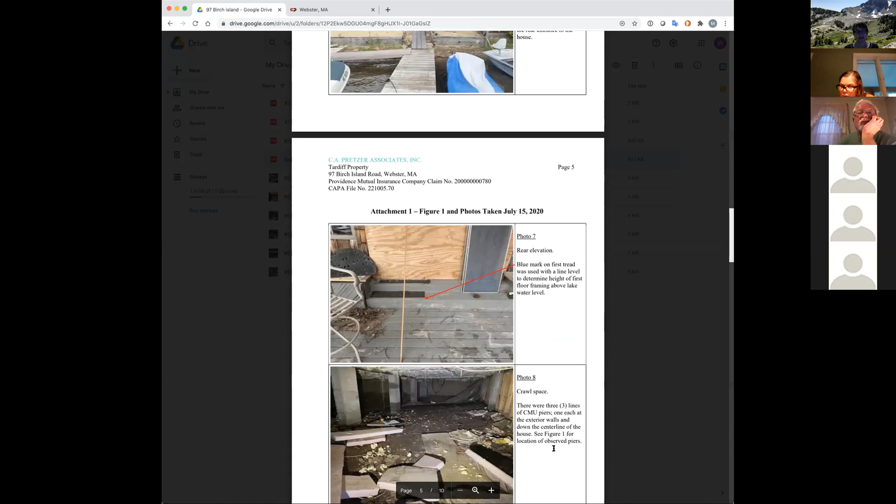Terrible. Yeah. And problems in the crawl space. Yeah, there's a lot of damage outside and inside also. Some of it just maybe junk, but yeah, a lot of damage.

Okay, so there will be a dumpster. I wasn't able to actually read that information that explained all the issues and the things they had to replace. But are they rebuilding in kind, or are they going to make improvements this time, or what's their plan? Oh, I think it's the same. They're not adding on or anything. They're just trying to fix it. Okay.

Yeah, I guess, Mary, you don't think they need any kind of protection in the back near where they walk down to the docks? It looks in the back like a patio area that's fairly flat, and then it slopes down toward the dock. Is that correct? Yeah, so yep.

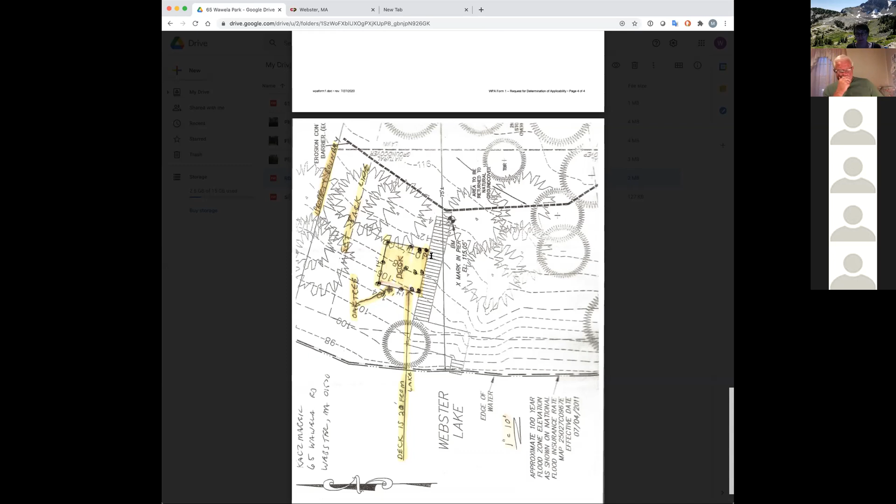Just so you know, Mr. Kaczmarek said that as far as when the work would actually be done, it really depended on when he could find a contractor to do it, and everybody's very busy. It could happen this fall, but it may not happen until next year. Oh, we have someone waiting.

Is there anything else on this one? I have nothing. I don't remember if I talked about the materials for the deck, but the cutting should take place on pressure treated - did he say pressure treated? Yes.

So do you guys still want the cutting to take place in the driveway? Yes, it's good practice. Yep. Okay.

All right, so I guess I will entertain a motion for this one, 65 Wawela. I will make a motion for a negative determination for 65 Wawela. Thanks, Hayden, I need a second. Second. Okay, Hayden, yes. Dan, yes. Robin, yes. Michelle, yes.

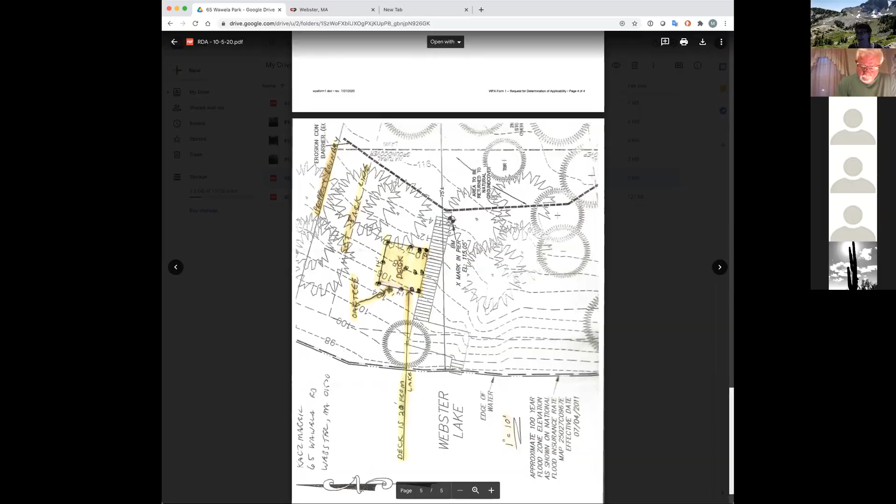So we haven't gotten Steve for 46 Bates Point, correct? Is anyone here for 46 Bates Point Road? We probably better - well, we can wait and see if he shows up, but maybe he's on Montana time. We could be done before he wakes up then.

Do we have to vote for a continuation on Hudworth? Yes, New England Auto Auction. Could I have a motion to continue New England Auto Auction to November 9th? I'll make the motion to continue New England Auto Auction till November 9th. I second. All right, Hayden, yes. Dan, yes. Robin, yes. Michelle, yes.

So Mary, I'm going to go a little out of order and do the other continuation so we can clean it up. I'd like to move for 23 Claybart Ave to continue to November 9th. Will someone make that motion? I'll make the motion to continue 23 Claybert Ave until the November 9th meeting. I'll second that motion. All right, Hayden, yes. Dan, yes. Robin, yes. Michelle, yes.

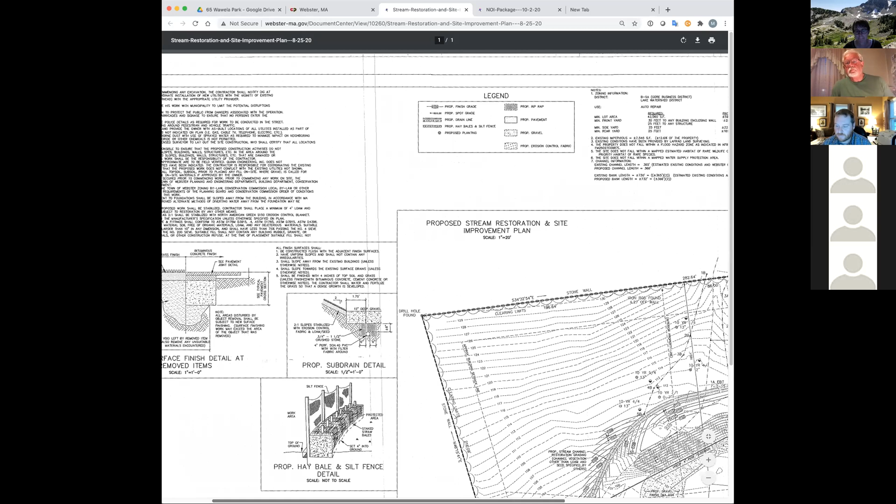So there was some unpermitted work that took place at 137 Gore Road. Behind the building of the business, there was a stream that was rerouted, some slope work done. That was noticed and reported, and notice of violations was sent out. It took a little time, but we got there in the end, and we have submitted an as-built notice of intent. Yeah, there's the plan, thank you. So, as it says, pretty much site stabilization, stream restoration, restore the stream to channel - that's really the lion's share of what took place.

So is there any particular detail anybody would like me to address? I think one of the things we talked about on site Saturday was that the grade on the plan and the grade in reality are different. Is that still true? I assume this is the same plan?

Yes, that is the date on that, revision 1. And there was only one revision on that plan, correct? Yeah, that is the correct plan.

Okay, looking at the site, you can see the plan there now. On the right-hand side of the slope where that letter H is, and from there to a little to the left, the slope is steeper than it is shown on that plan.

But a lot of time has passed. The slope has re-vegetated pretty well. It's a very bony soil, there's a lot of stone in that slope. Over the time this issue has been going on, even though the slope is steeper than shown on the plan, there doesn't seem to be any erosion down into the parking area. So it seems to be stabilized at this point, even though it is not as shown on the plan.

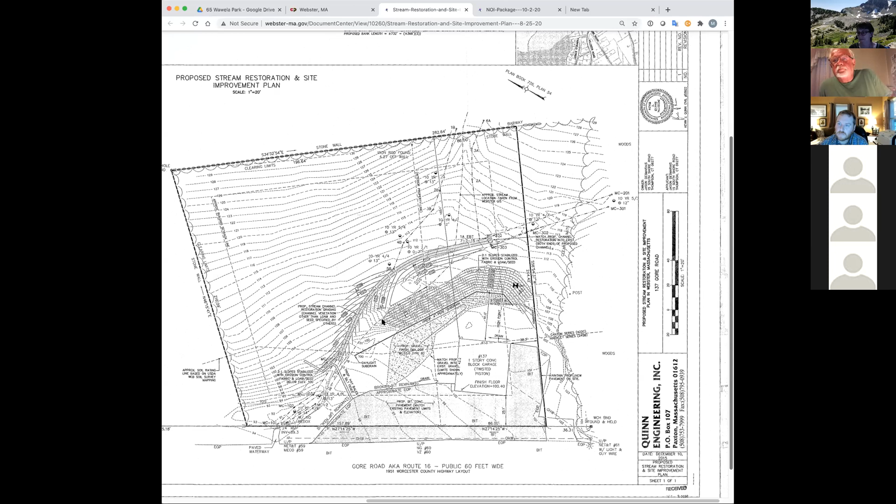We were also told on Saturday that 15 feet of pipe were removed from the end. I think back one of the times we looked at it, there was actually pipe catching some water and moving it along, and now it's more of a natural stream. Some of that pipe was taken out. Correct, yeah, there was a perforated pipe that had been in place and that was removed, and it's now just stone.

One thing that was a little unclear on Saturday, and I didn't think of it at the time, is there still a plan to put the line of boulders in the back of the shop? I know when you look at it, there's some stone at the very bottom of the hill, and there was going to be some boulder movement back there, and I'm unclear whether that's still going to happen.

So with your approval, he would like to place boulders at the bottom of the slope, taken from the top, move to the bottom. That would be in front, closer to the street than the current stone path. Plans to put them right at the base of the hill, right at the base of the slope, the stabilized slope.

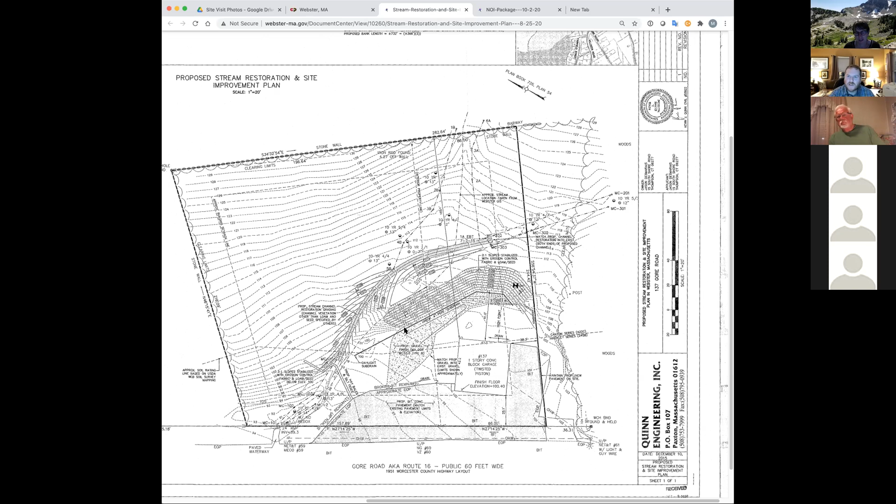It has that natural look. The coverage in those most recent photos looked pretty solid. Let's see, there they are. Yeah, there's a lot of stones and stuff, but yeah.

Yeah, I get the vegetation is reasonable. As we observed on Saturday, it's not pretty, but it seems to be functioning pretty well.

And I know in one of our previous visits there, Fred was concerned about the walls of the bank of the stream up gradient, he felt like it was caving in, and I asked Brandon if he had looked at it and had any concerns, and he did not.

Well, this one does not have a DEP number yet, Michelle, so we can discuss it more, but probably should hold off on closing the public hearing. Especially since, well, anyway, DEP may want to, because they were involved in asking him to do this notice of intent. We'll see what kind of input they have.

Are there any other questions or comments from the commission? Do we have anybody from the public that has a question or comment on this one? So quiet tonight.

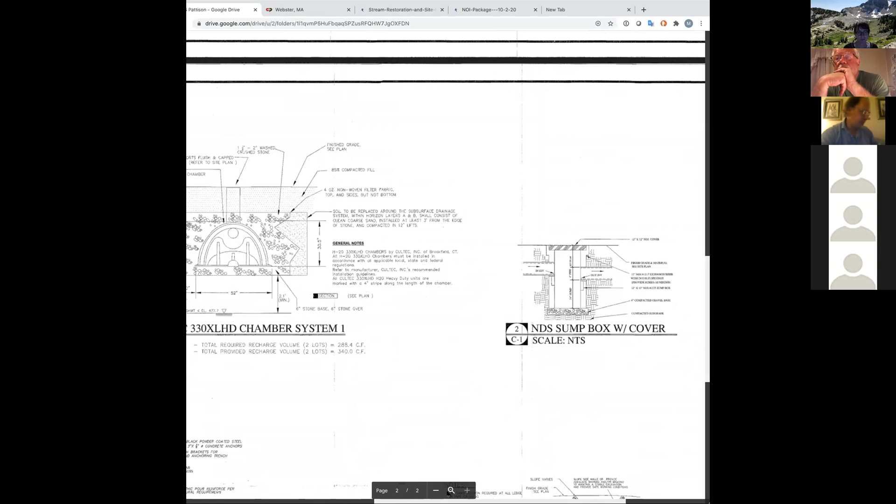So that's the basic design. We have also details on sheet number 2 of these systems. There's also a detail of the trench of the sump box. The Cultec chambers, there are 2 models, one is deeper than the other, as the land grades off, so we use the shallower ones. And there's also a detail for a roof overflow, roof leader with downspout overflow.

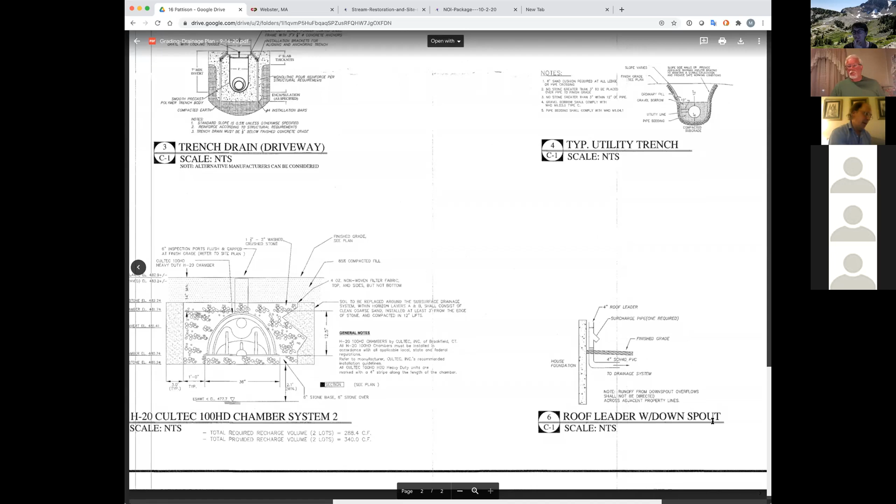So that's that. I'm available to answer any questions the commission might have on the design.

I have a question. Do the downspouts in the rear of the houses on the lakeside connect with these Cultec systems or not? They do not connect to it. There's only a partial roof of each dwelling connected to the Cultec systems. The rear downspouts go on splash pads. And then this was really the only change to the plan, using the Cultec systems instead of what he had proposed.

And it sounds like you brought the elevation of the houses up a little bit from what they were. Yes, I believe the original plan from Wetlands Identification was based on a GIS, not an actual survey. Right, this is the actual survey, and I noticed that it kind of correlates the same way. There's a difference of 2 feet there between the two plans, but it's basically the same thing. Where they have 484 between the buildings, we have about 486. It's basically the same thing.

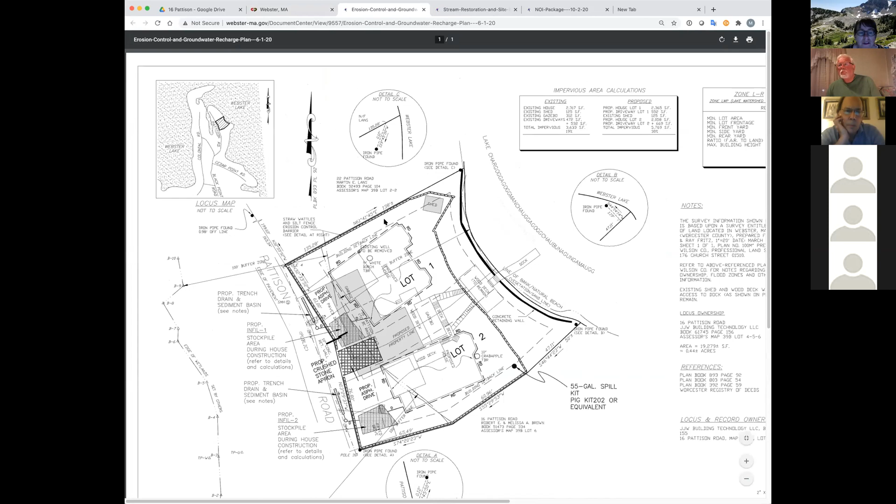Okay, so your question about the downspouts, that's from the original plan? Yeah, the original plan, this is the new plan. I can pull up the original, probably. Take me a minute here to find it. So we can see what looks different. So that was that. I mean, we approved what I guess the original plan did not mention the downspouts. It looks like it had everything going into this kind of crushed stone. I believe it's a crushed stone bed. There's really no actual detail of those. Right, yeah.

So once those downspouts hit a splash pad, they're going to hit cement and then go into the grass, or into the lake. They could also go into a crushed stone apron to dissipate some of the energy. We try to keep the slopes as shallow as possible. In the back of number 16, we have a somewhat large swale to convey the water also. So that's what we're working with, trying to flatten out the site. And yes, crushed stone apron or concrete pad will work also for the downspouts.

But then I guess I'm looking at 20 where it says downspout splash pads. What is that? A splash pad is basically a small concrete pad, it can be plastic also. Yeah, that's not what I meant. So once off the splash pad, is it going into grass? It goes onto the grass, yes.

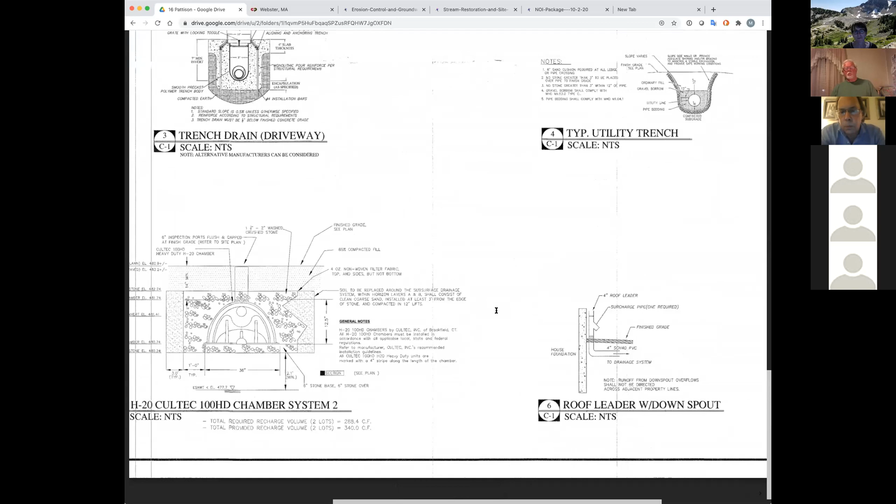I'm trying to figure out how far away from the lake it is. I guess there's a wall. Those rear downspouts, how much of the roof is serviced by those downspouts? I would say about 30% of the roof, each roof it goes into the infiltration system. 60% does not. So 60% is going to end up in the grass? Yes, and the grass and also on the roadway, on Pattison Road. And the driveways, though, they also go into the Cultec, right? So the Cultec is handling the driveways and then 30% of the roof. Approximately, yes.

The Cultecs seem like they're pretty large. Is it possible to route some of the roof drainage into them or not? Well, we take a conservative approach on the design of these systems. Some engineers use percolation tests, we use the Rawls method, which is very conservative, so we are assured that this will work. I would not want to overload the system by connecting more downspouts than what our numbers say they can handle. Of course, if you would want us to connect those downspouts to the system, we can certainly do that with the understanding that they will be overflowing on a more frequent basis.

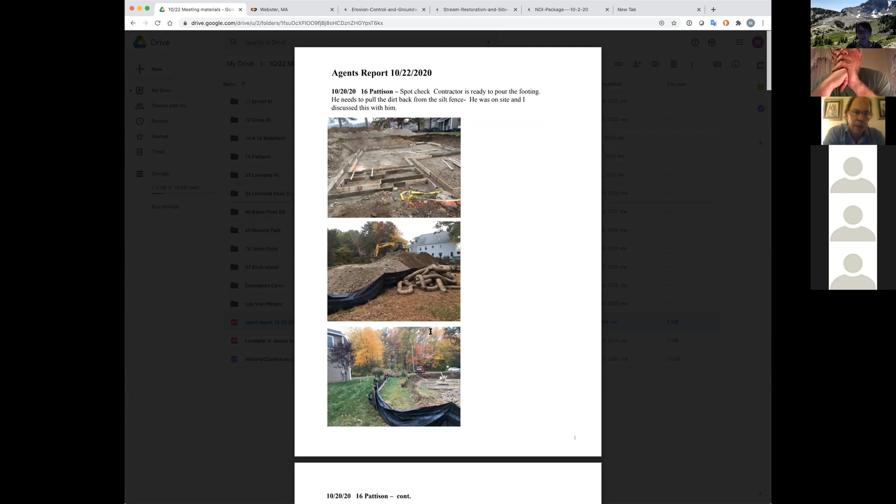Let's see if I have other pictures. On this side, it wasn't quite as sandy. This is the back, which he needs to fix.

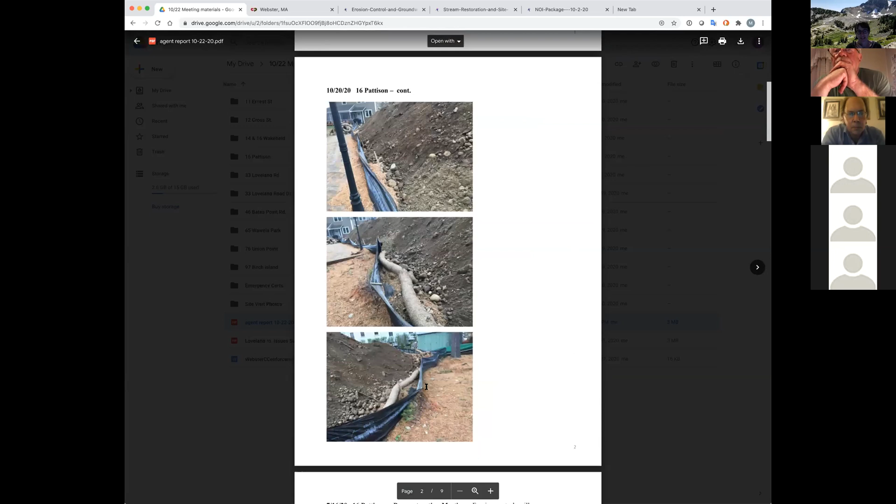I don't recall any new construction where 60% of the roof just drains onto the lawn. I feel like we tie in downspouts and do all kinds of other things to prevent that.

Well, and like I said, we can revise the plan and connect the downspouts to the infiltration systems. I think the elevation will allow that. If that's the only concern of the commission, we can certainly do that.

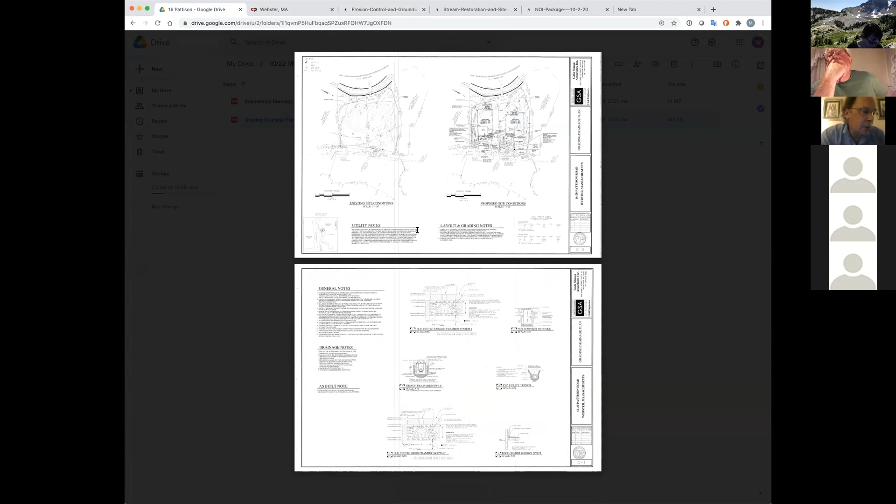Are your Cultec sized to handle the 60%? They're not, not as they are right now. They're not sized for that, according to our numbers. But there will be an overflow on the downspout in the front, preferably.

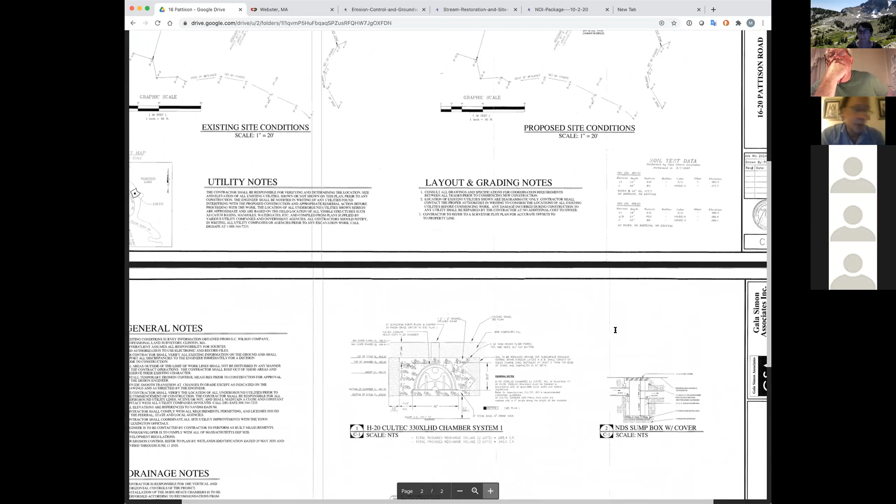So if it does get overloaded, it will just go up to the street, not going to the lake.

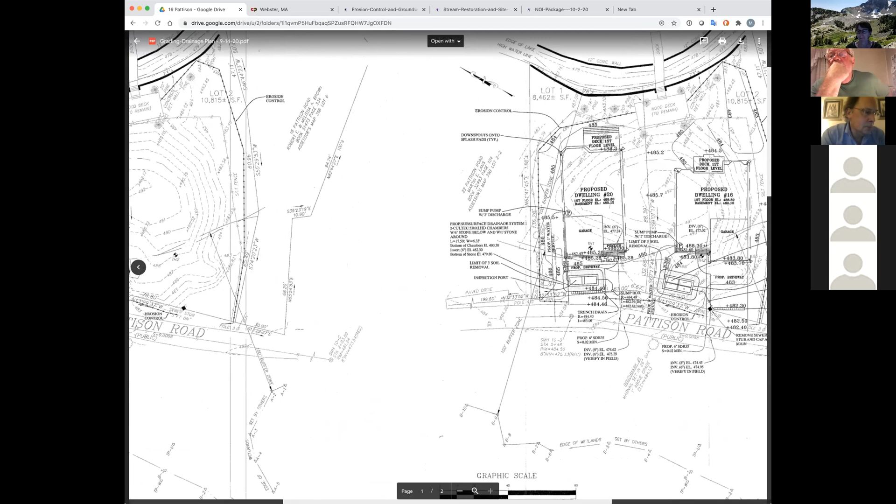Personally, looking at this, it would seem preferable to me that those Cultec have the capacity to handle at least part of the water runoff from the roof. If there's going to be Cultec there in the first place, might as well make use of them.

And but as you're saying, that would probably require slightly bigger Cultec. Well, it certainly depends. If we're designing it for the 10-year storm, we'll require probably doubling up on the size of the Cultec to handle that amount of impervious area.

Other than the cost of the additional size, would that cause any other issues that you're aware of? Well, we have water lines and sewer lines coming in the front of the building, so we have to work around those. That's the only issue I can see, other utilities, interference with other utilities. Yeah, it looks like there would be room to get around that.

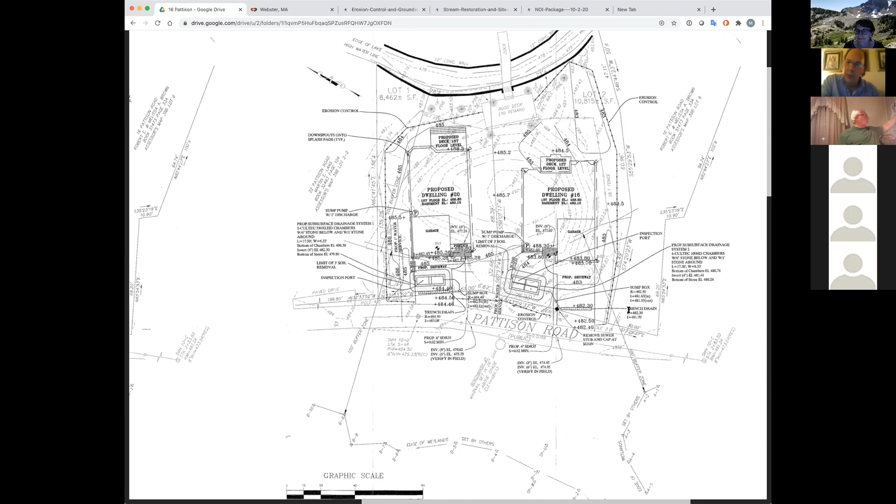Okay. I think we're on 76 Union Point.

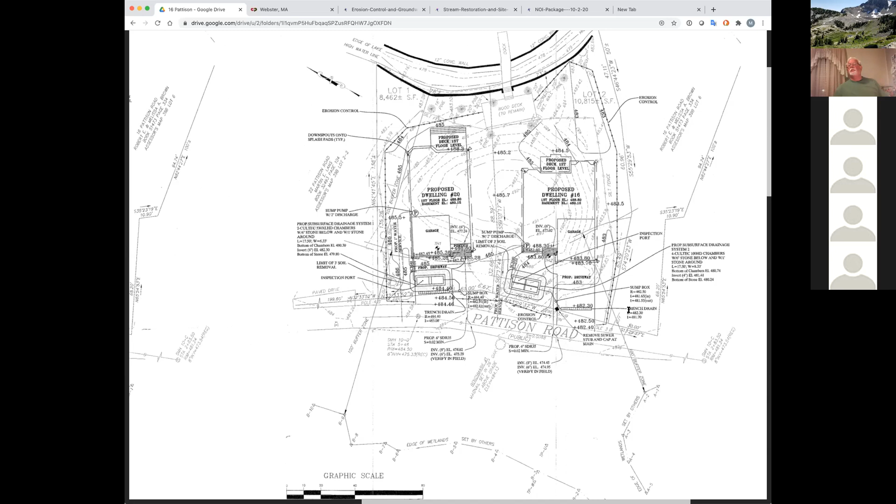Yes, and I believe I saw that Linda was on. And I'll try to pull up the pictures for her. Hello, Mary, I am here. I'm having a little trouble with my microphone on my computer, so I'm using my phone. But can you hear me okay? Yes, hey, you okay? Okay.

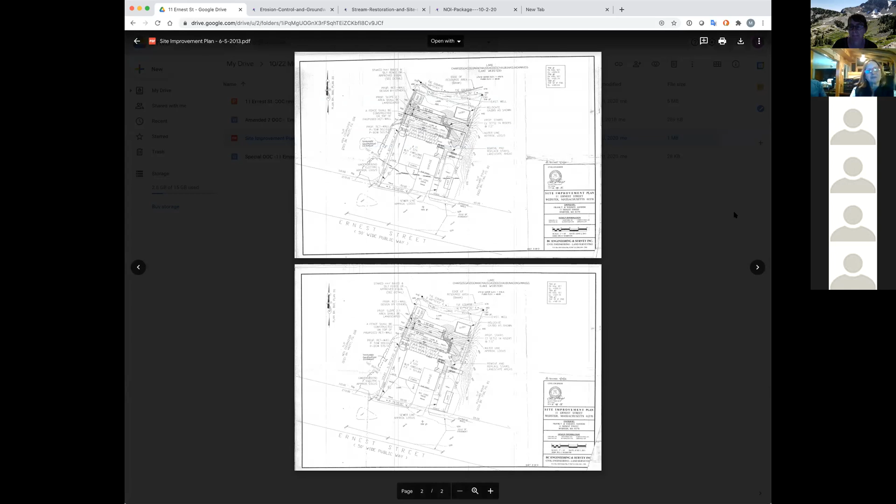We didn't think we needed to finish that before asking for approval, since it's outside the 100 feet. The part along the side of the house is finished. Right, that it is outside the 100 feet. I just did want the commission to know. So I have a lovely new fence here. They got the fence in, but they're still working on putting dirt in the holes, right? Right, and then right in here.

They had put a new retaining wall. And just this area back here, I noticed it's just kind of a little bit dirt. Are you planning on planting grass, or is it just going to stay? Yeah, because I have planted grass here, but it's like clay. So I put lime down and that's supposed to break it up, and I'll give it another shot.

Okay, so I did notice that the retaining walls do have the nice 3-inch gap everywhere. It's beautiful, actually. So this one here, yeah, they do have a small area that is not quite stabilized yet, but I guess they're working on it. The rest is - there's a retaining wall here and then the retaining wall there. It's lawn. Everything else looks really nice.

And I hope I emailed you guys the right one - I might not have though. And the permeable patio is done, that was the last thing. Yes, and the patio is beautiful as well. So there are those two tiny issues - I think the fence in front is out of the 100-foot zone, they're just not quite done with it, they have a couple holes that they need to fill. But so if you guys wanted to wait, you could, but I don't think those are major issues.

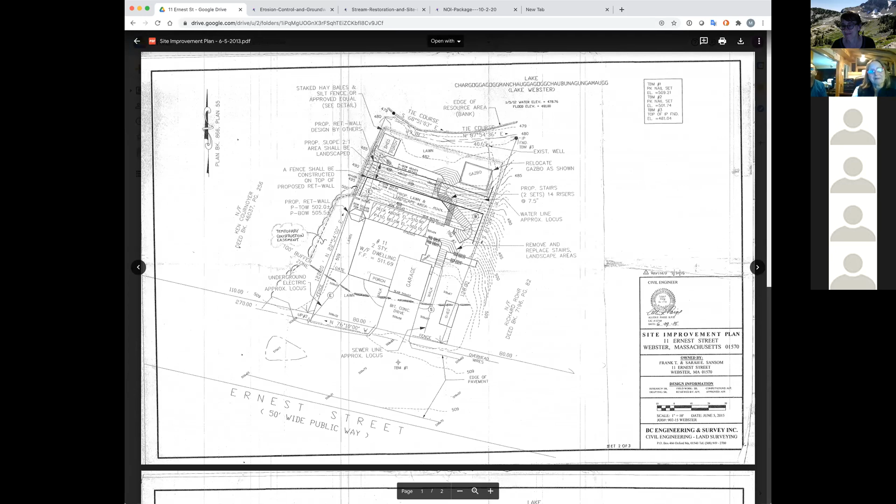Great. So I will look for that as-built. It'll be useful for our record, but it wasn't required on the order of conditions, I don't think. Okay, okey-doke. Thank you so much. Thank you, take care. You're all set, thanks.

Do we want to go back and deal with 46 Bates Point? Yeah, I think we should. He doesn't seem to be coming.

Does someone want to make a motion for 46 Bates Point? What would you like a motion on? To continue 46 Bates Point? I make the motion to continue 46 Bates Point Road until the November 9th meeting. I'll second that. All right, Hayden, yes. Dan, yes. Robin, yes. Michelle, yes.

You're doing great, Michelle. Oh, thanks. A lot of work. Joey owes me. Yeah.

All right, so I think we're at emergency certs. 29 Beacon. Yeah.

So they just need to be ratified because they've already been issued.

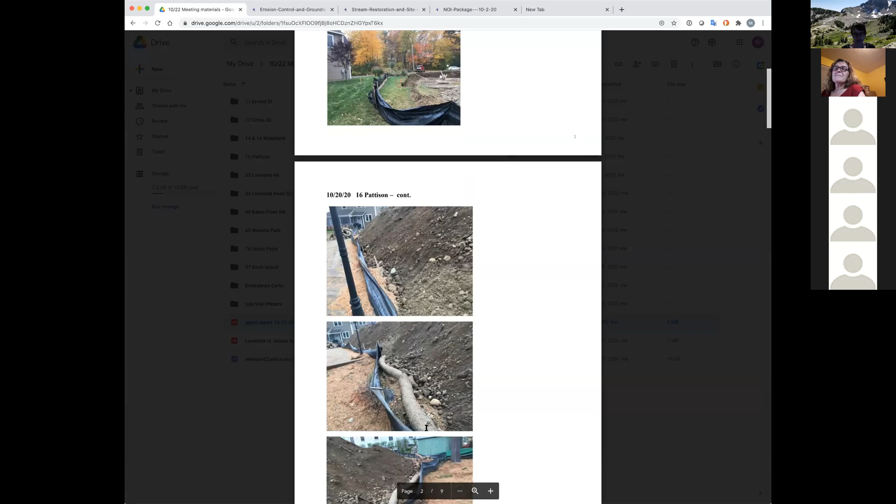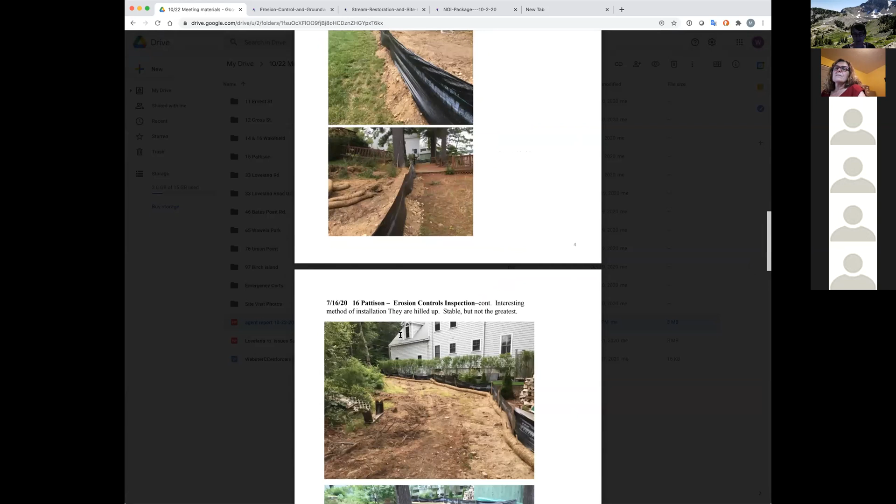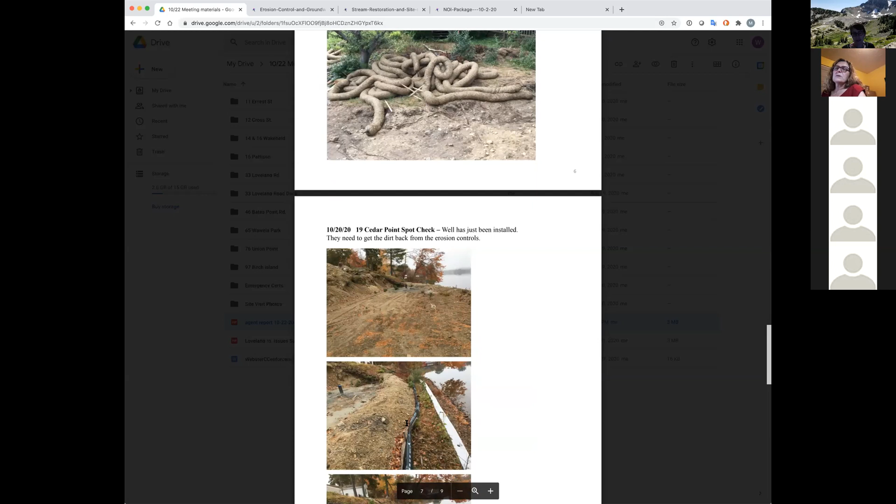And that's 16 Pattison, and then also 19 Cedar Point. They put their well in. She still needs to fix her erosion controls, and the guy who put the well in - again, look at the silt fence there, it's in need of some help. So I need to talk to those guys, and these are pictures from earlier this summer.

There's a lot of other stuff going on. Joey and I need to get these pictures to you guys. Joey and I were out at Aslan Drive, and we approved Kenny to widen the drainage channel there, which is actually a beautiful wetland, or had been a beautiful wetland, full of cattails. But after more talks with the neighbors, Kenny convinced Joey that it really needed to be - and it is - a drainage channel, kind of built into the subdivision. So they did clean it out. We'll try to get some pictures of that to you guys. I'm trying to think if there's anything else that was kind of urgent.

Yeah, I've been doing a bunch of pre-construction meetings and stuff like that. It's been busy.

Always busy, Mary. I don't think you've ever said that it's not. Yeah, it's true. I was just thinking maybe it's going to slow down soon when the snow starts flying.

I know that there's a revisit order of conditions, but that's a Joey thing. Right, that was just kind of, they wanted to wrap the trees, and I just probably need to write up a sample condition for you guys and get it out.

I did look at silt fence though, orange versus black. It seems like the orange is available, maybe slightly more expensive depending on where you get it from. And it's not quite like the black - you can get it in all these different options, with the stakes, without the stakes, all this stuff. I think you have fewer options with the orange, but it is available. So I don't know whether you maybe want to save the orange for sites where it needs to be more visible, or something.